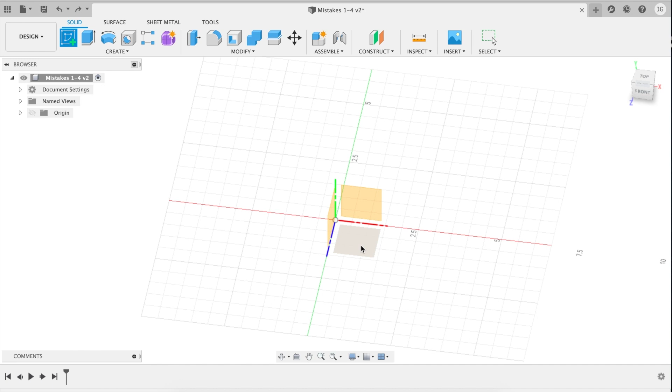The first few mistakes we're going to cover today regard the efficiency of modeling. The first one is always use revolves instead of extrudes when you can. For example, if you want to make a wedding cake, one way to do it is to extrude that guy out, make another sketch. Extrude that out, so on and so forth.

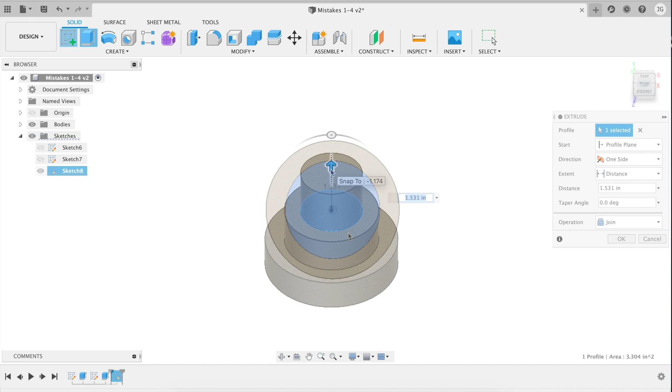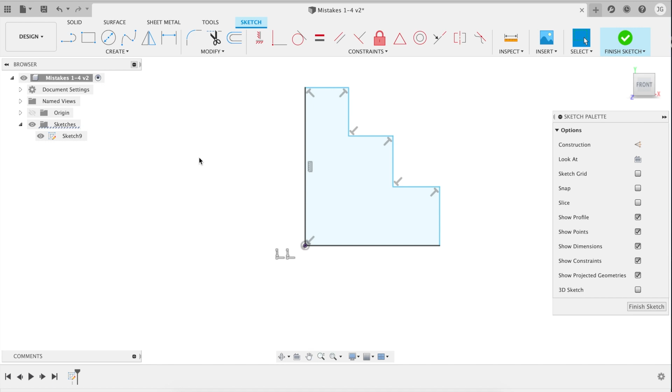Most likely not modeling a wedding cake, but this is really handy when you're dealing with bearings, washers. So instead of doing this, you see in our timeline we have 6 different things. We can just make a sketch, make a line, go through, make our wedding cake shape, and then quickly revolve that around our center. There you have it, quick, simple wedding cake.

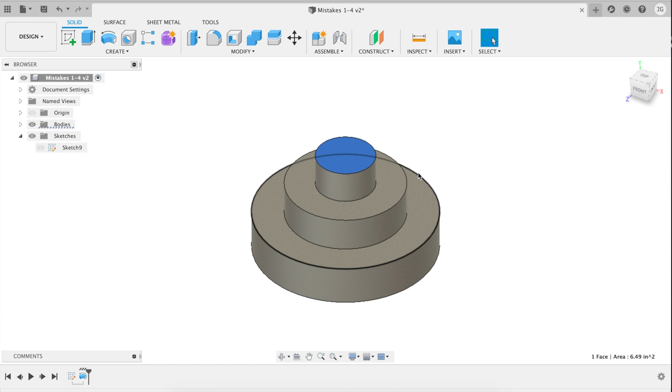The next mistake we're going to cover is creating an extrude with a sketch versus without a sketch. Something that's really powerful that Fusion does is instead of, let's say I want to go and extend this out, I can go in here and create a sketch, project this circle out. So I'm clicking P, projecting that circle out, and then going ahead and extruding this further. That's one way to do it.

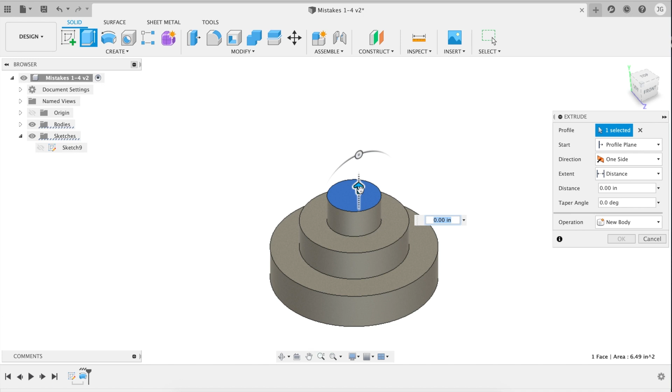But if you notice, I have a sketch there and a feature. But the better way to do it is to just go ahead and extrude the face. Or fillet, sorry, and then you make it, let's say, 1/2 inch.

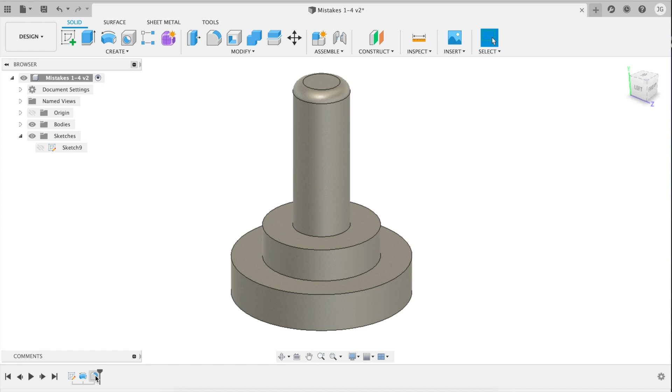And when you start dealing with a lot of edges, so let's say we want to do every single one of these edges here, it doesn't take a lot of time, but it takes a bit of time and aiming to get all these lines. A better way to do that is just click on the surfaces. So you just need to click on that surface, that surface, on that line and that line. And instead of having to do 8 clicks or 6 clicks, you only have to do 4.

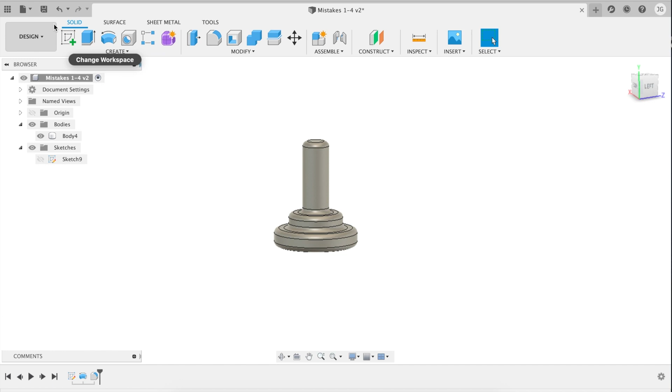The fourth mistake we're going to cover is with regards to mirroring. So let's say we have another object here. Let's say we have another revolved object even. Let's make it a bit more complicated this time. So now we have our 2 objects.

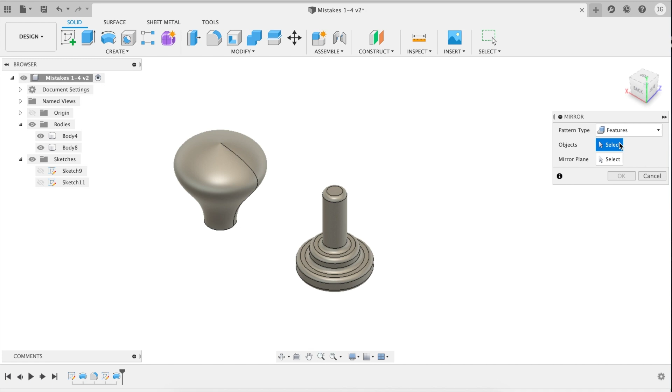And a common mistake is, when you're in the middle of doing a complicated project, to say, okay, I have to get this one mirrored across this plane, so let's do that. And then you go about, do your modeling, and then say, oh wait, I have to mirror this one across this plane as well. And sure, that might get you to where you want to be.

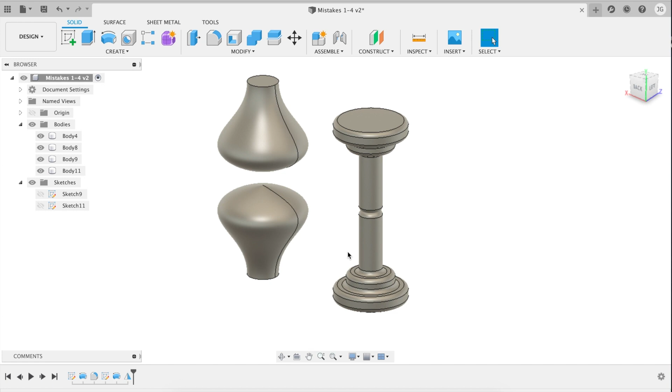It might seem obvious, but the much more efficient way to do it is to just mirror both at the same time. And this is super obvious in this example, but when you get to more complex things with different features, then it becomes much less obvious.

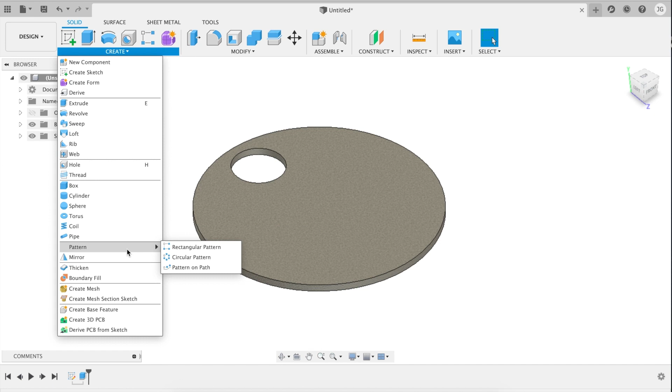And also in regards to mirrors, when do you pattern inside a sketch and when do you pattern outside a sketch? And it's a great question because let's say I have this and I want to have 7 of them. Let's go pattern, circular pattern, axis. Let's make it 7. So that's one way to do those holes. But we're all about simplicity. So if you see here in our tree, we have 3 different items.

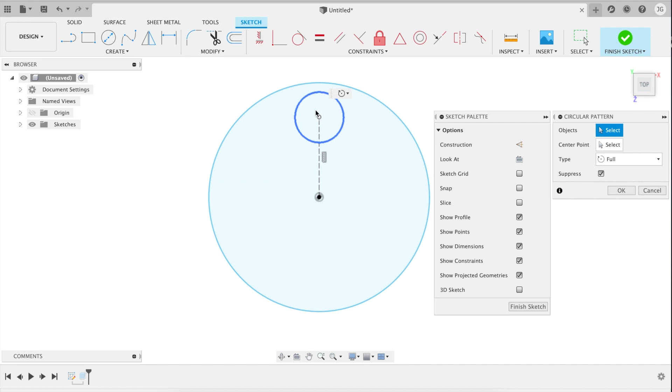The rule of thumb is if you're dealing with one object, a single object like we have here, do the patterns in the sketch. If you're dealing with multiple objects, do the patterns in the feature. So, for example, we're going to circular pattern this guy around our center, make 7 of them. Great. Now we can rectangular pattern the body in the way we want.

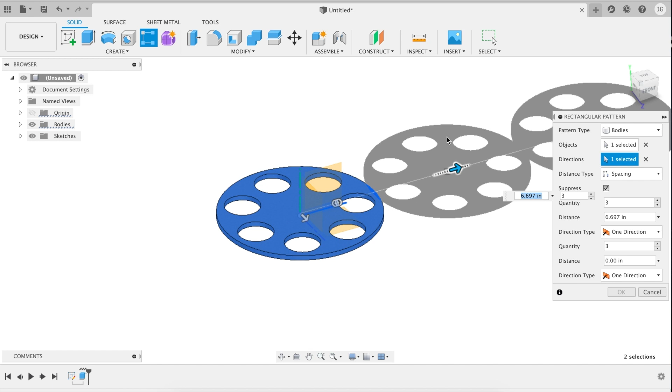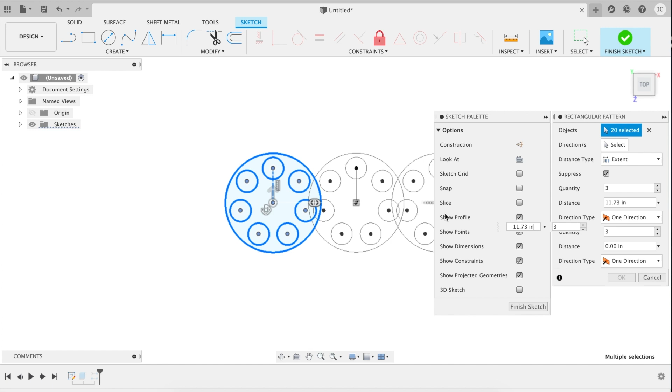So we don't want to do the rectangular pattern in the sketch, we want to do the rectangular pattern in the body because you're balancing overcomplicating the sketch and overcomplicating your timeline. Doing these 7 holes in your sketch is super simple. You don't have a lot of dimensions going around, but let's say you rectangular pattern this guy like what we had, but you do it in a sketch. Then you're dealing with a bunch more lines, a much more complicated sketch, especially when you're involving dimensions and parameters and all that.

Then it gets much more complicated. The sixth mistake we're going to cover today involves extrudes and the to object versus distance. So when you're creating an extrude, you see here I have the option for the extents. I can either do a distance, to object, or all. You can't do an extrude all with a new body because then it's just going on to infinity.

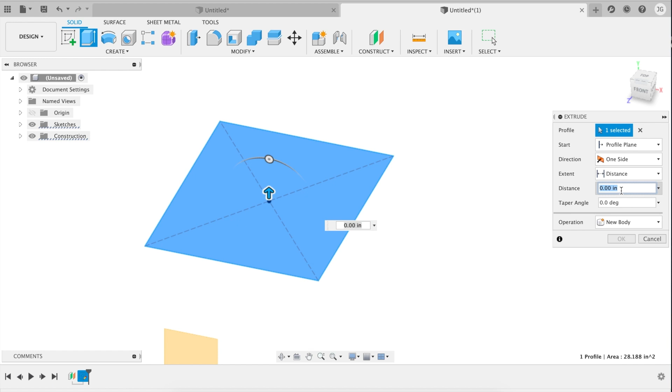You can, however, do a distance. So let's just make that 3 inches, right? And now I have this other plane here where I'll do another sketch. And this one I want a little rod coming off of the box. So now I have this circle and I want to extrude it to this box. So let's click on the box, and that's what's really nice about Fusion.

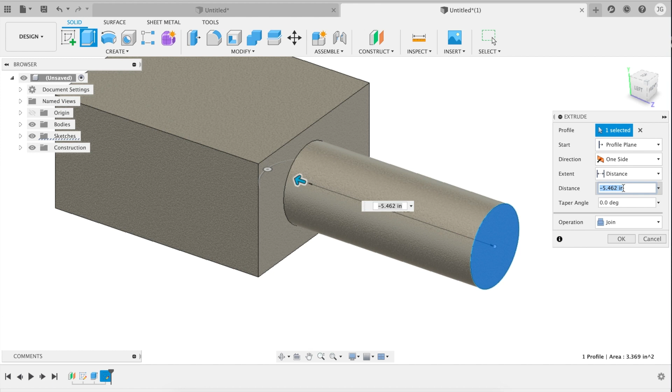You just click and it automatically sets the distance to negative 5.462. So it just does that for you. There's no messing around with it. You press OK, and then great, you have your design. But the tricky part is when you're trying to make a design modular, you really never want to use that command, the clicking distance command, and I'll explain why.

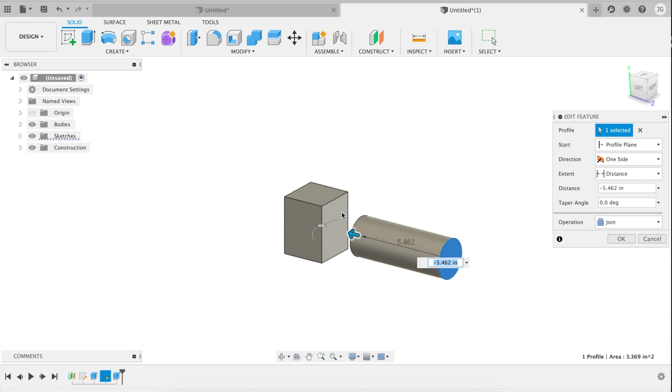When you go back here and you want to change the size of this box, click there, and then look. It still goes that same distance, but it doesn't go to that box. So a workaround is instead of extent distance, you go to object and you click there. And really, I always use to object. It's very rare that I use extent when I'm trying to bring one box to another because it's easier, but there's no point to it in the long run.

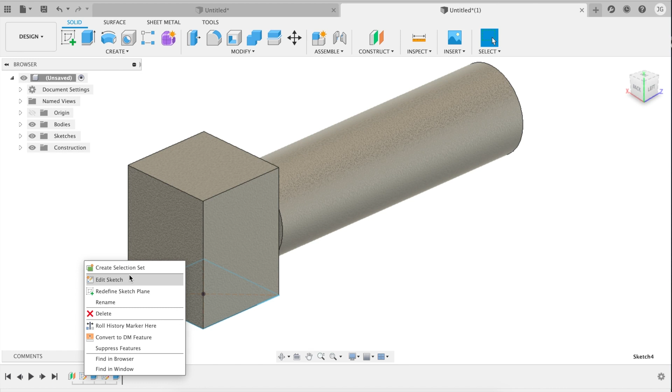When you're trying to edit the design and you're trying to change a dimension, then it is really difficult to make it a modular design. So now it's stuck there.

The second to last mistake we're going to cover here today is one of the most important ones. It is parameters. And parameters sound scary and complex, but really they're very simple. Our goal today is to make a box where the width is double the length. So you can find parameters under modify, change parameters, and I already have a parameter here.

You can just add a parameter here, and you can change the unit. So this one, the unit is inches, so the length is going to be 5 inches. This one is going to be degrees. So the reason why I can't have an inch length in the degree is because it's inches, not degrees. So the way to do that is this is really length inches, and you have to divide that by 0.5 inch to cancel out the inches and end with a degree.

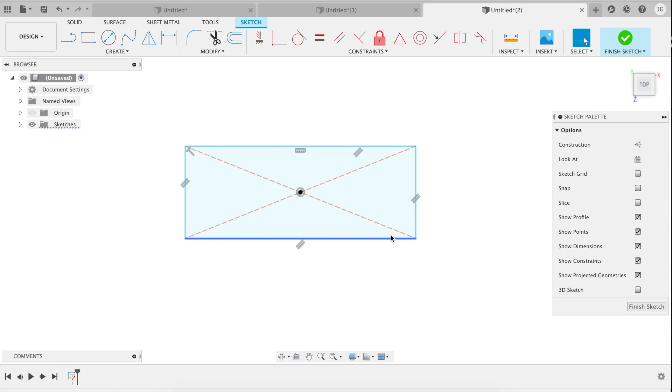As you can see here, we have the name of the variable, the unit, the expression, so what we put in, and the value. So this is without the unit. So let's just make that 5 for now. Great, so now we have our two parameters. Let's go in here, and right now we're just going to type in length. Great. And here, we can type in length times 2, because we want the width to be double the length.

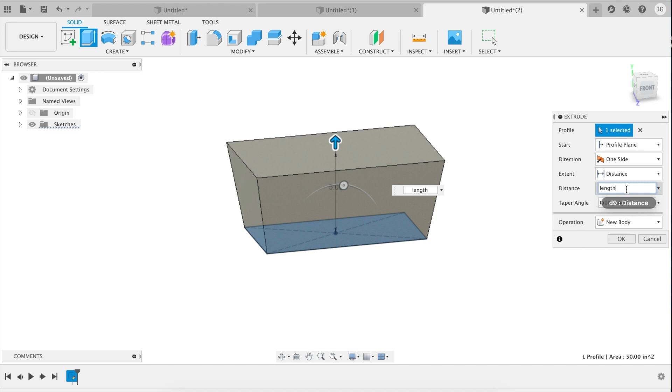Our extrude is going to be length as well, because we want it to be 5 inches, and our taper angle is going to be taper angle, the one that we decided on. Great. So that's our box. And actually, just to give us a sense of size, we're gonna make the distance 10. So now that's our tapered box.

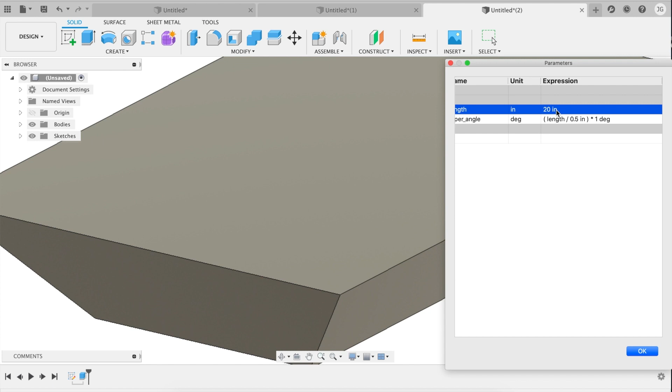Now we can go back to change parameters. So for length, instead of 5, why don't we change it to 20? So now the length is 20, the width is 40, and the taper angle is 40 as well. And the height is still 10.

The last mistake we're going to cover today is the biggest. When you're designing something and you're scrolling through here trying to find whichever one you want, you go here. You're trying to find whichever one you want, whatever. It takes a lot of time. The easiest way to do it is just click S and you have your search command.

Here are the really easy ones, but let's say we want to do a center point slot. Go right here. There's no need to go using your mouse. It's all on the keyboard.